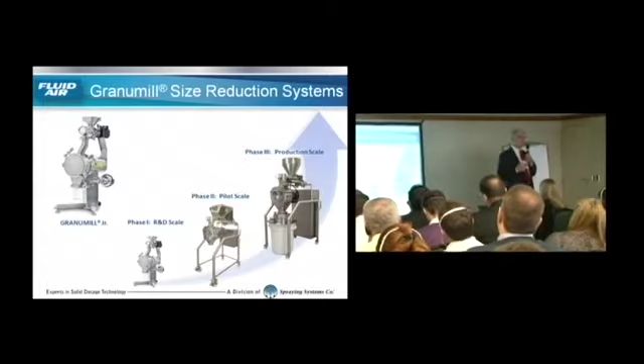Okay, finally I'm going to talk to you about size reduction. Once again, we build everything from an R&D scale machine to a pilot scale to a production scale. What is size reduction? Well, some people call it milling, some people call it comminuting, and it's typically used in pharmaceutical applications to uniformly size products that are going to be then blended and compressed into tablets or filled into capsules. This shows the fact that our machines are basically a hybrid between a Fitz mill and a co-mill.

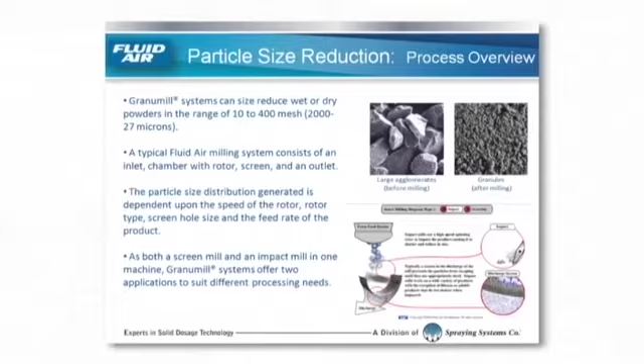And are many of you familiar with what are called the SUPAC regulations for scale-up and post-approval changes? I know it's a U.S. guideline, but it's for the use of equipment that is similar in functions. And our machine, our Granumill, which we have at the exhibit, by the way, a small scale one, is actually a screening mill as well as a hammer mill. So if we can show some of the animation there.

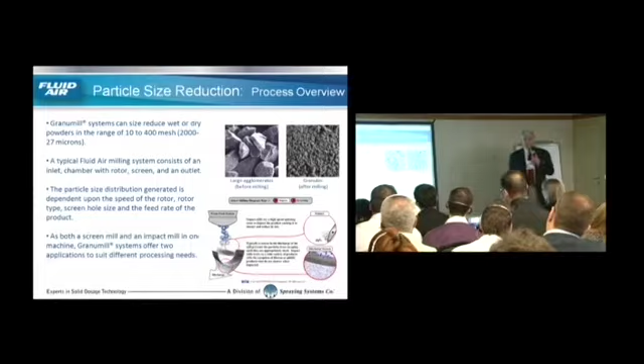Basically what we're doing is we're feeding through a screw feeder. We impact the product, and the product then passes through a screen to discharge. Go ahead to the next one. This is the inside of the machine, and it's got a rotor connected to a variable speed drive, and we make it in various forms.

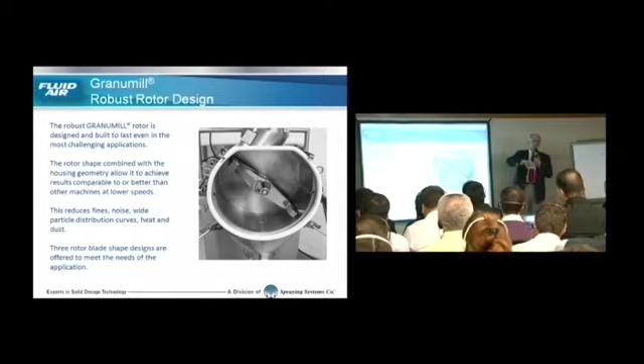This is a flat edge, which would be used for fine grinding. We also can make it in a rounded configuration, which is more useful for wet milling. And we also make it in a knife-edged version that would be used by some people that are using the knife edge, for instance, with a Fitz mill.

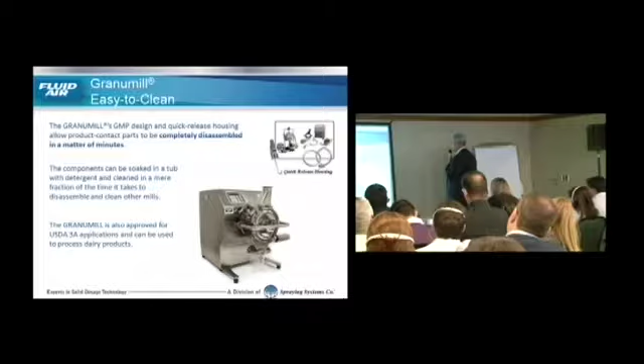So the advantage of this machine is that we can do a variety of tasks with it. We can delump, we can fine grind down to 27 microns, and we can use it for wet milling and dry milling. It's a very versatile machine, and it can be taken apart and cleaned in a tub. So you can take these machines apart very quickly. They all come apart with Tri-Clovers and components that can actually be put into a sink and cleaned. And there are no cracks and crevices within the machine.

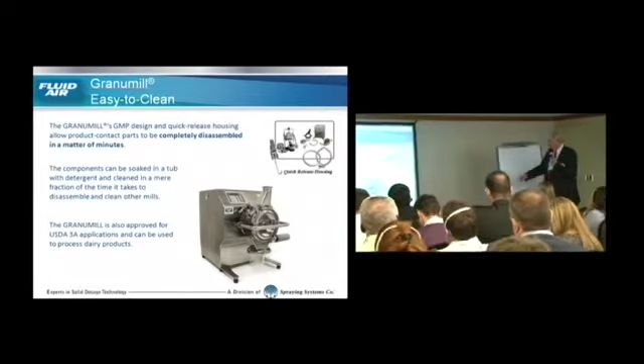And this probably doesn't mean anything to you, but we have what's called the USDA 3A rating, which means that in the United States, these machines can be used for processing milk products, which is the highest sanitation requirement for this type of a machine, which means that it's designed to be able to provide for easy cleaning and very thorough cleaning.

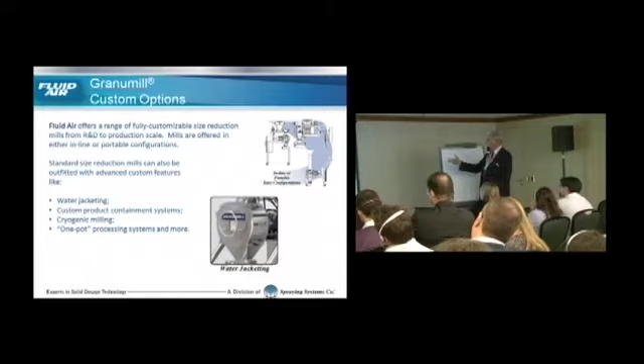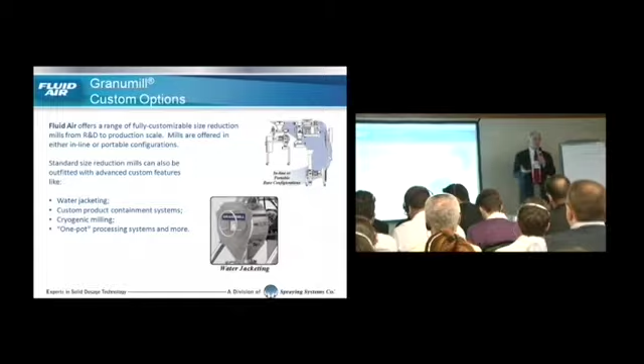Okay, we can provide these machines for both the R&D level and the production scale. We can make them inline, or we can make them standalone. So sometimes we'll put a milling machine directly beneath the high shear mixer on a swing arm. So you can move the arm back and forth when you need it or you don't need it. Put it underneath the discharge, wet mill the product, vacuum it, or gravity feed it into the fluid bed.

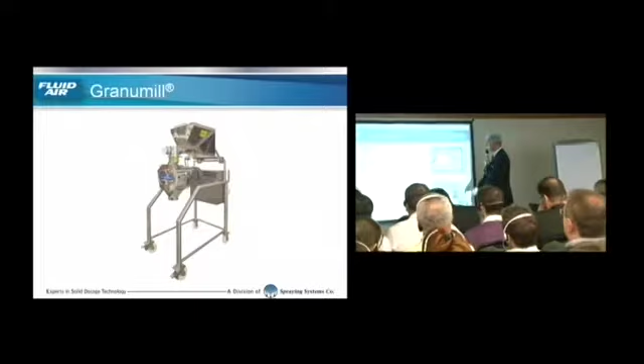You can do that, or you have a standalone machine which can be pushed around and used for a variety of applications. And that's our pilot scale and manufacturing scale machine. That's got a hopper, got a screw feeder. This is the operating chamber right here. Oops, back up. This is the operating chamber, and then your discharge. We can make these dust-free, by the way, through various options that we offer.

Okay, we also do controls. Batch Architect controls are basically Allen Bradley hardware with our own software. We have our own software developers, and we work with you in developing the software for the application that you have. We write the software, we send it to you, we send our technicians down, or very soon we will have a technician right here in Sao Paulo capable of being able to troubleshoot and help with your process controls. And our system is called Batch Architect Controls.

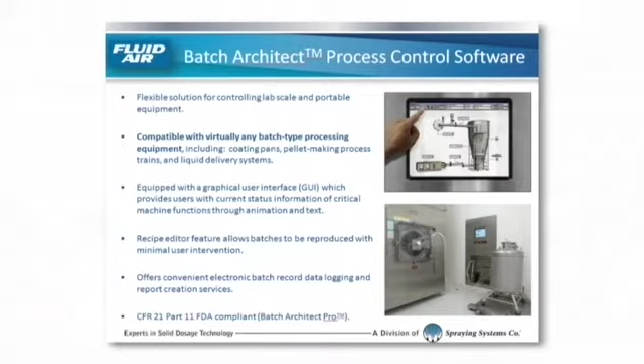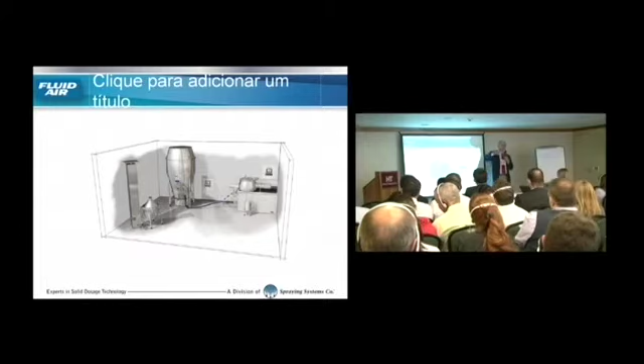Okay, I'm wrapping up here, and I think I'm within my time limit, right? This shows an application where we're high shear mixing, and this has the mill beneath the mixing bowl. And what we're doing is we're vacuum transferring it to the fluid bed using the fan on the fluid bed for the transfer. And this is a bowl inverter. This picks that bowl up, inverts it over a dry mill or over screening, however you're going to process your product next. This is one execution.

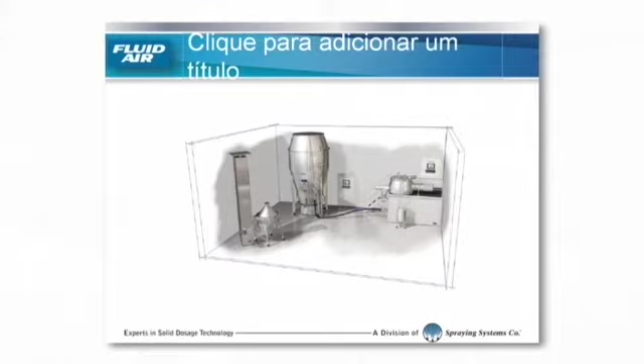We do work with our customers in designing the facility. In this case, we're using the mixer located here on the floor, but we can also produce a stacked version where we put the high-shear mixer, elevate it, and then discharge by gravity into the fluid bed. So there are a variety of different applications and uses, and it's all dependent on our customer and what their experience is going to be in processing products as to what we recommend that they do, because we want to give them the most efficient system for their product mix in the space that they have available to install the equipment.